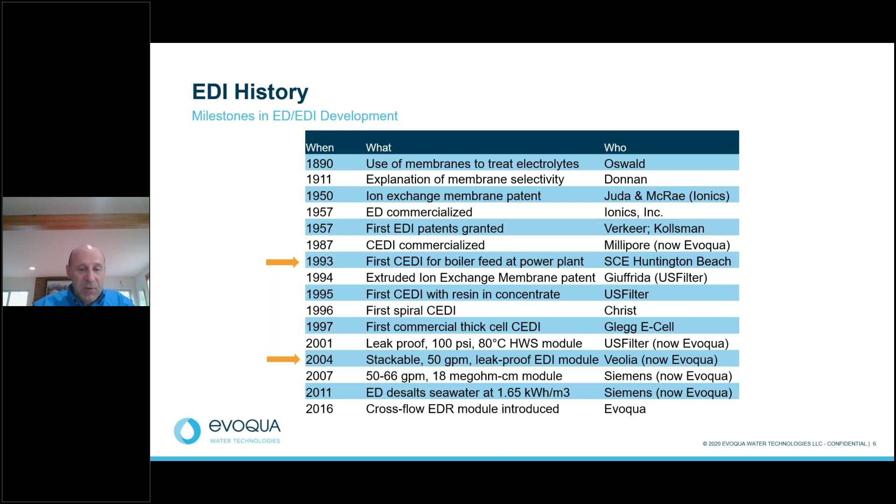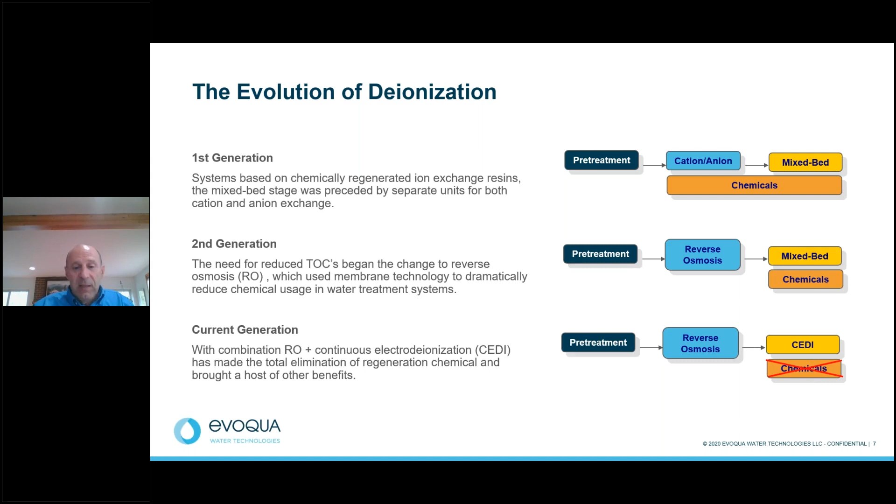A little bit on the evolution of deionization. You can break it down into 3 generations. In the first generation, you've got the flow of water through pretreatment and then into cation and anion exchange, and then into mixed bed resin and chemical regeneration. Later, in the second generation, there was the introduction of reverse osmosis, and you still had mixed bed and chemical regeneration, bringing us to the current generation where you have pretreatment, RO, and then into CEDI with no chemical regeneration.

I wanted to give you a view of the evolution of the technology in terms of flow rate and footprint. If you look at this slide on the left, you'll notice there was a system back in the 80s that had 20 gallons a minute of flow and occupied 20 square feet. Going to the right, that 20 gallons a minute jumps to 60, 120, and then up to today's standards, which are 528 gallons a minute in just 31 square feet. A tremendous improvement.

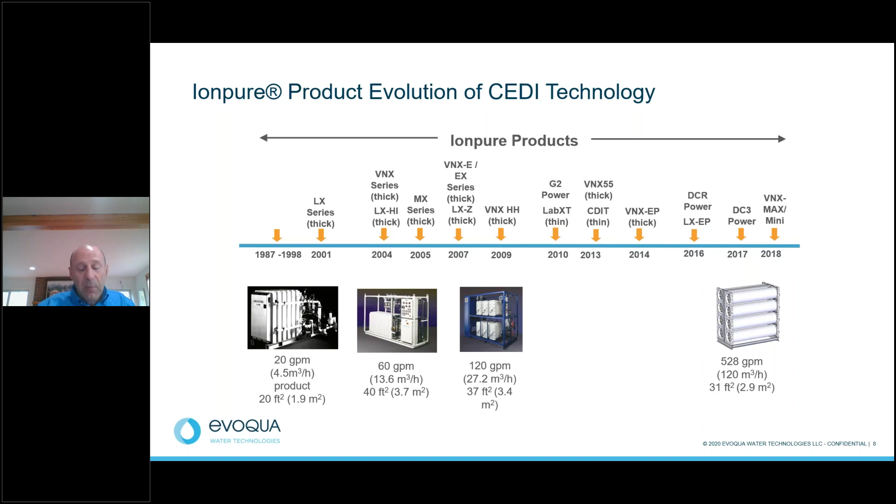I'd like to go into the basics of CEDI technology. First, this is an electrochemical process, based on the science of opposite charges attract and like charges repel. Essentially, you've got cations migrating towards the cathode and anions migrating towards the anode.

And you add ion exchange membranes and you get electrodialysis. This membrane is a sheet form of the ion exchange resins, and what's happening is you essentially take the resins, grind them up, and recast them into a sheet form. The membrane has a fixed charge and it's selectively permeable.

You've got an anion membrane with a positive charge, it's anion permeable, and it repels cations like sodium. The cation membrane has a negative charge, it's cation permeable, and it repels anions like chloride. These membranes are impermeable to water.

This is a little counterintuitive if you're not familiar with the technology. Most people think the water is going through the membranes, but the water is actually flowing past, not through, the membranes. These ions are diffusing through the water trapped in the membrane, and you've got alternating membranes using screen and gasket channels. Essentially, the salts are transferring out of the product stream and into the reject stream.

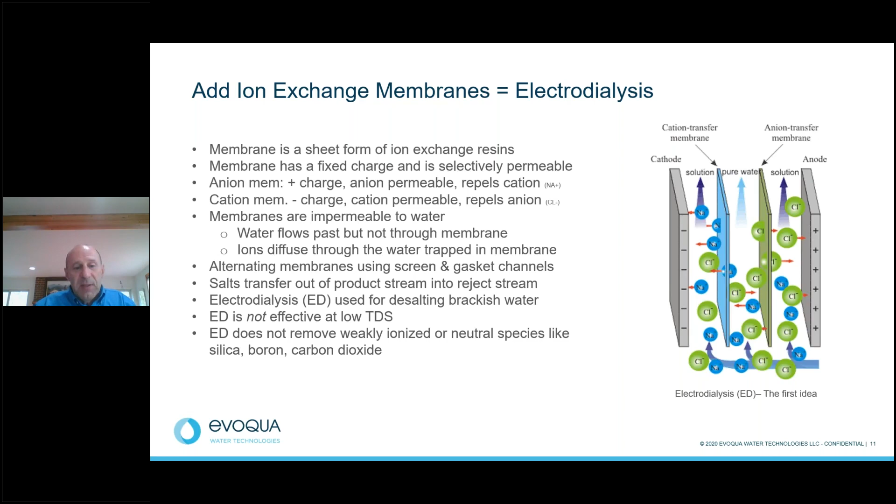Electrodialysis as a technology is used for desalting brackish water. It's not effective at very low TDS because it does not remove weakly ionized or neutral species like silica, boron, and carbon dioxide.

So you add resin to electrodialysis and you create continuous electrodeionization, or CEDI, which is a technology improvement on electrodialysis. The difference between the two is that CEDI uses ion exchange resin between the membranes, which is not the case with electrodialysis. This resin is very conductive, and it facilitates water splitting, which is important to allow the resin to regenerate.

The resin needs a special cell design to contain it. If you've ever felt the resin, it's very slippery, small beads—you put it in water and it's essentially fluidized, so you really need a special design to contain all that. CEDI is often referred to as filled cell electrodialysis.

When the salt is removed with electrodialysis, the system can no longer transport current and remove ions. So you have no current, then no water splitting, and no regeneration. CEDI, on the other hand, is designed to produce high purity water. The ion exchange resin allows for the removal of weakly ionizable species such as silica, boron, and carbon dioxide.

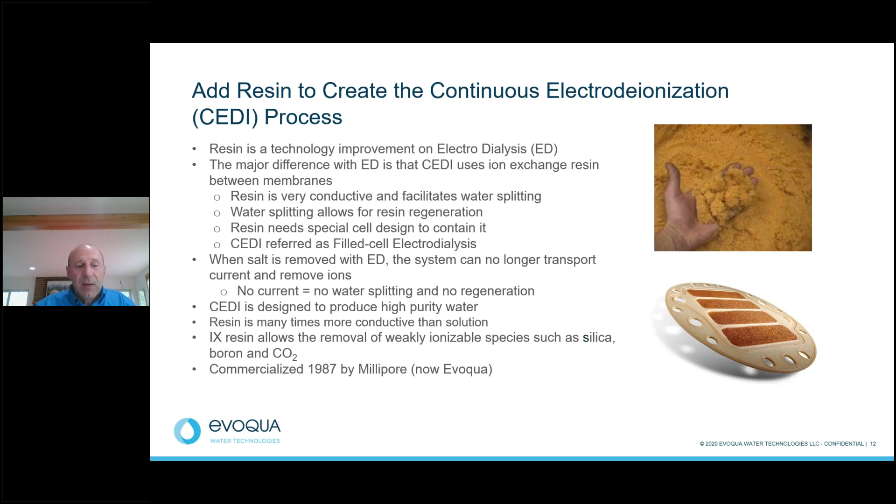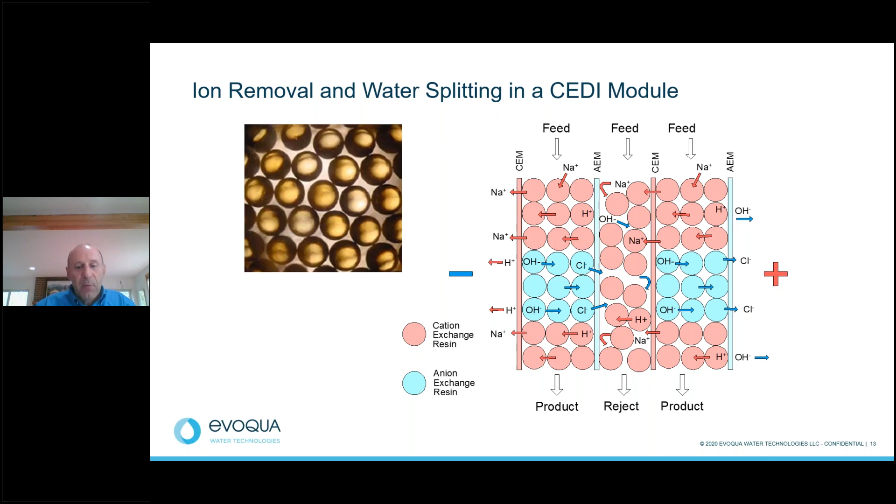This slide demonstrates ion removal and water splitting. Cations like sodium and hydrogen pass through the cation membrane, whereas anions like hydroxide and chloride pass through the anion membrane. Water is coming in through the top, and then the product and the reject are flowing through the bottom.

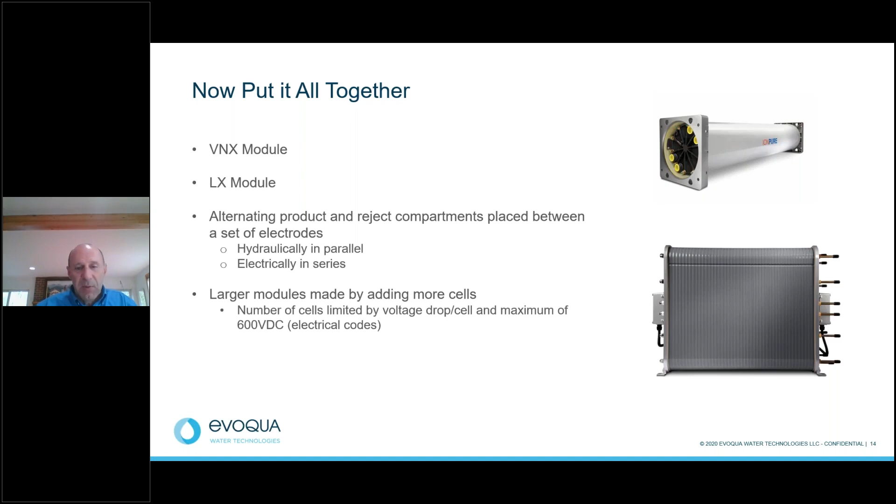Put it all together and you see here our VNX module. This is our flagship product for the power industry, with some of the highest flow rates of any module on the market. Down below you see the LX module, also used in the power industry. It has been used for many years, but with the introduction of the VNX, most applications are now using our VNX module because of its high flow rates.

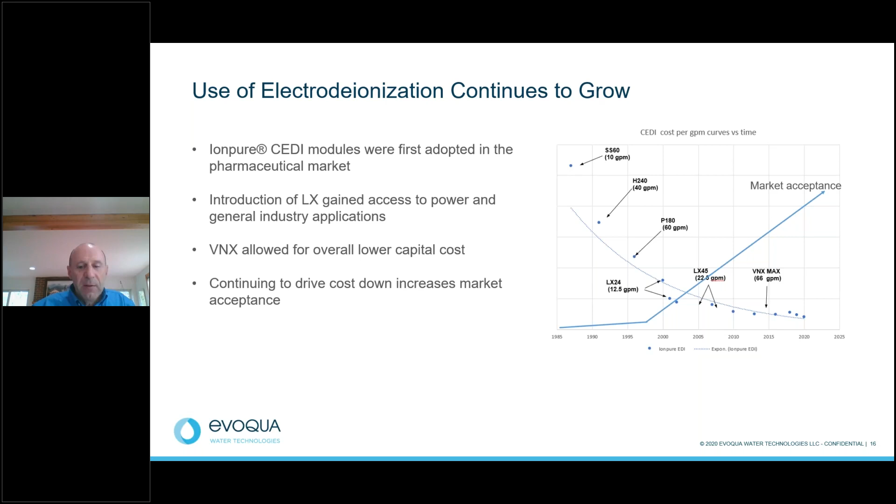Early CEDI modules back in the mid-'80s produced only 10 gallons a minute, as compared to today's VNX Max modules, which flow at 66 gallons per minute per module. So the greater the flow rate, the lower the overall capital cost, and the greater the adoption rate of CEDI over mixed bed DI.

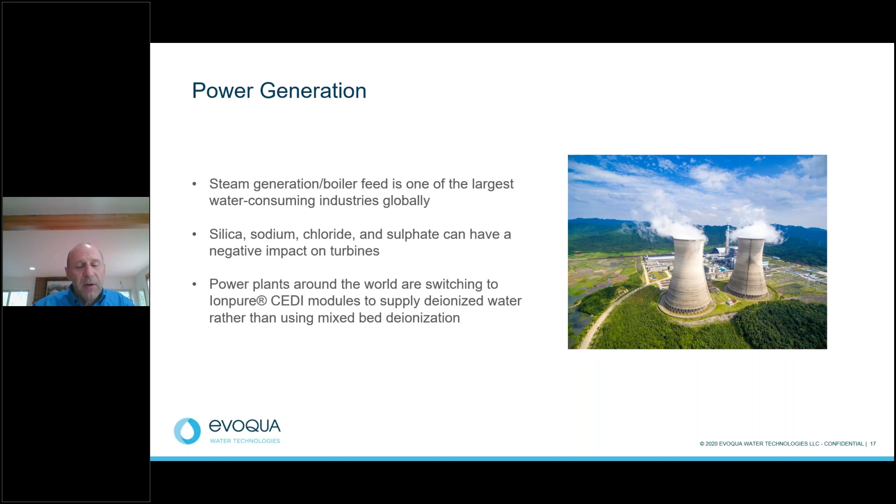CEDI is an ideal technology for the power market. The main issue for power generation is the impact of scale formation on the turbine blades, which reduces efficiency. With the size of some of these markets, just a slight reduction in efficiency of the power generator can cost very large dollars, so it's very important.

As you can see from this slide, high quality water is needed for boiler makeup in the range of 0.1 microsiemens conductivity or better. In some power applications, we recommend a 2-pass RO for the CEDI feed water, and also to very carefully control the CO2 in the system.

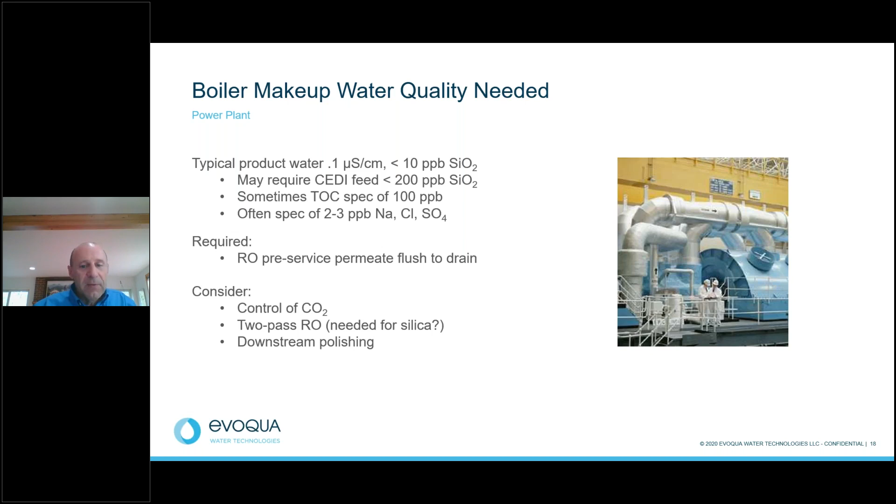So why is the power industry choosing CEDI over mixed bed deionization? Well firstly, no chemicals are needed for regeneration with CEDI. This is a huge advantage. Another is that there's less downtime, and this is a proven technology. CEDI has been around for dozens of years, and it's absolutely a proven technology in power plants.

You'll experience very consistent performance with CEDI technology. Our modules are guaranteed to be leak-free. This type of system has superior safety over mixed bed DI. You're not trucking in chemicals and regenerating on site. There's less space required, and it's also lower cost to operate one of these systems.

You've got reduced labor. Our process, CEDI, is a continuous process. It's not a batch process. Mixed bed DI is a batch process. Overall, you've got a reduction in environmental, health and safety risks when you're using CEDI.

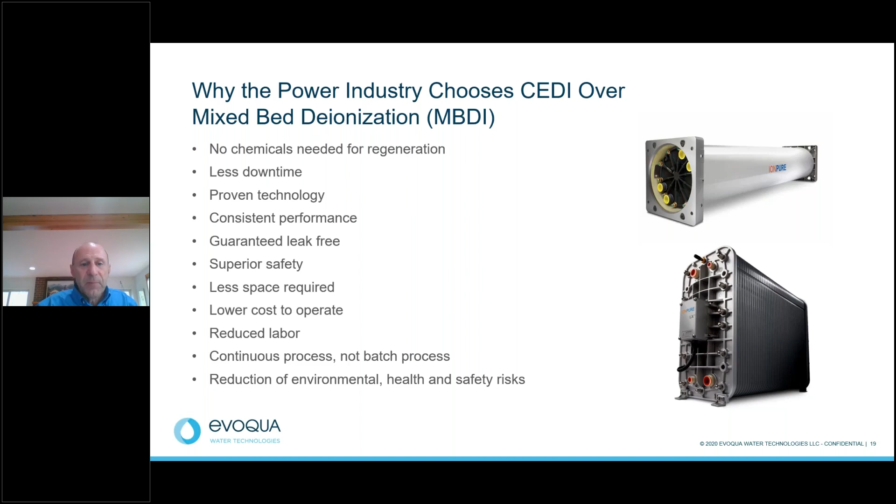The chart here on the left highlights how mixed bed technology is a batch process. So when the resin begins to deplete, the water quality goes down, and the system cycles through the chemical process again and again, regenerating the resin. Compare this to CEDI technology, the chart on the right, and you see a consistent line here. It shows this consistent water quality. So this is one of the main differences with CEDI technology.

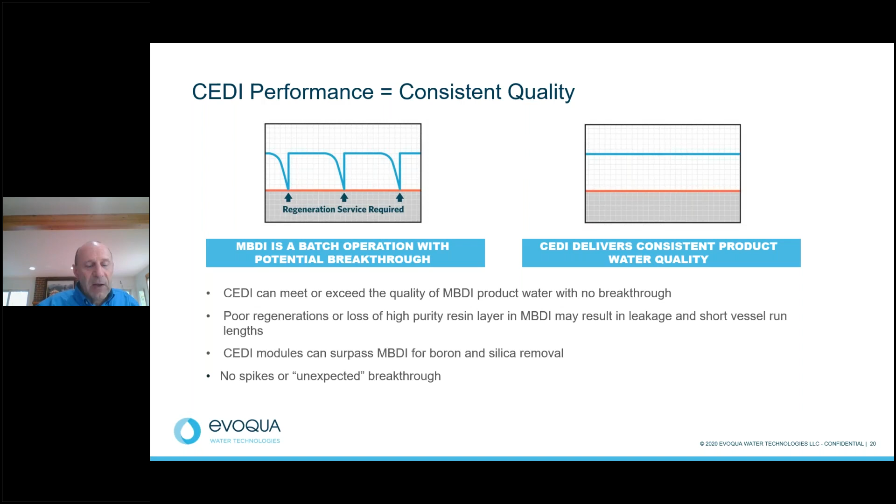I'd like to give you an overview of our products. This chart here shows you that we offer many products from the LabXT through the VNX, and this is showing their flow rates. So looking at the LabXT, this flows at fractions of a gallon per minute compared to the MX module, which is up to 2 to 3 gallons a minute.

The LX, our LX45 module, has a nominal flow rate of 22.5 gallons a minute. It will flow up to 30 with certain water conditions, and then into the CDIT and VNX module. The VNX module has a Max module, and that flows at 66 gallons a minute and up to 100 gallons a minute, again depending upon the water quality.

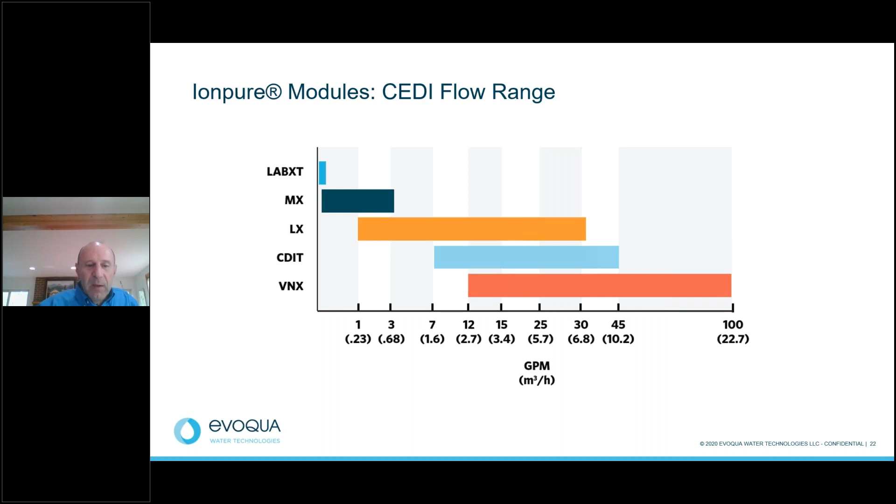Another view, this is a pictorial view of the various products. So here's your LabXT in the upper right. Our MX module looks like this. And then the LX used in the power industry, and the VNX. And then very importantly, here's our power supply, the DC3. This is very important as OEMs are building systems. It makes the whole process simple, and it's designed for these modules.

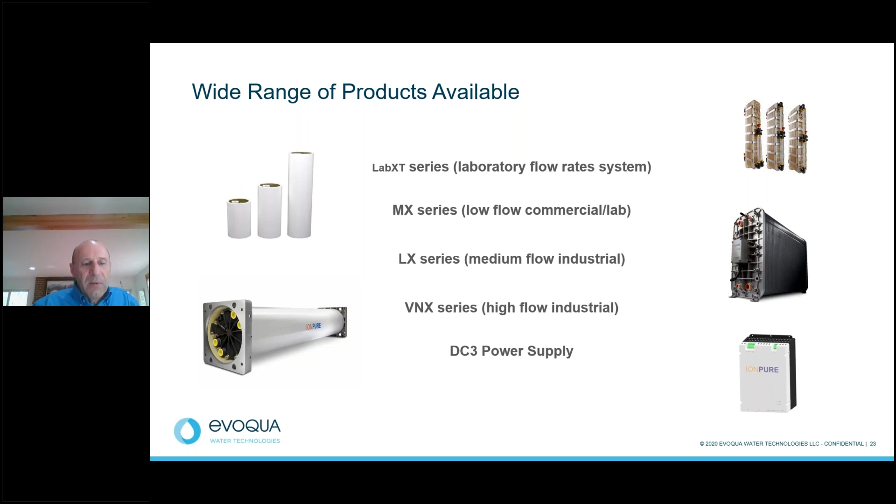A little bit about the LX series. This is a medium flow product for the power market. It was introduced in 2001. We offer 6 models from 2 to 22.5 gallons per minute nominal flow. This is a thick cell design in which both the dilute and the concentrate spacers are filled with resin. It's designed for high pressures up to 100 psi, continuous operation up to 113 degrees Fahrenheit.

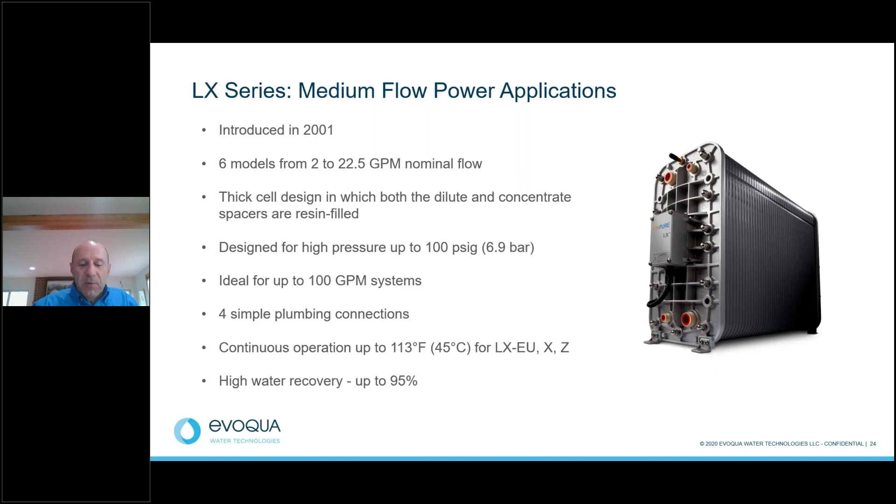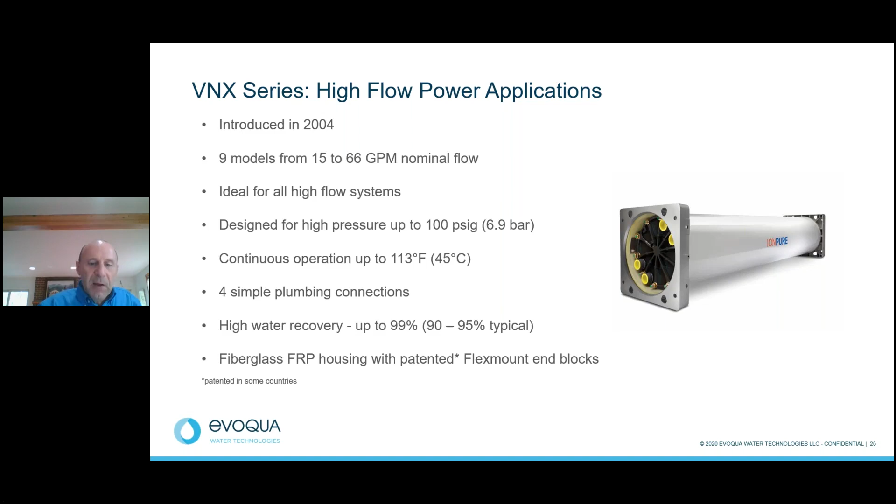The VNX series offers a wide range of module types. On the top here, you'll notice we have the VNX Max, the Mini, the EP, and this is a smaller version of the EP. These modules here are ideal for the power industry, and most typically we use these in those systems.

The Max, again, flowing up to 66 gallons a minute at nominal. The Mini is a great option because it's not as long, so it's shorter in length at 52.8 gallons per minute. The VNX EP 55 is a 55 gallon a minute nominal product. It's the same length as our VNX Max. And then we offer a shorter VNX 28 EP, which is shorter yet at 27.5 gallons a minute.

We also offer several modules that are optimized for the microelectronics industry and producing over 18 meg water, the VNX E and the EX. In addition, we have the VNX 55HH and the CDIT. These two modules were designed for higher feed flow challenges and product water up to over 16 megohms.

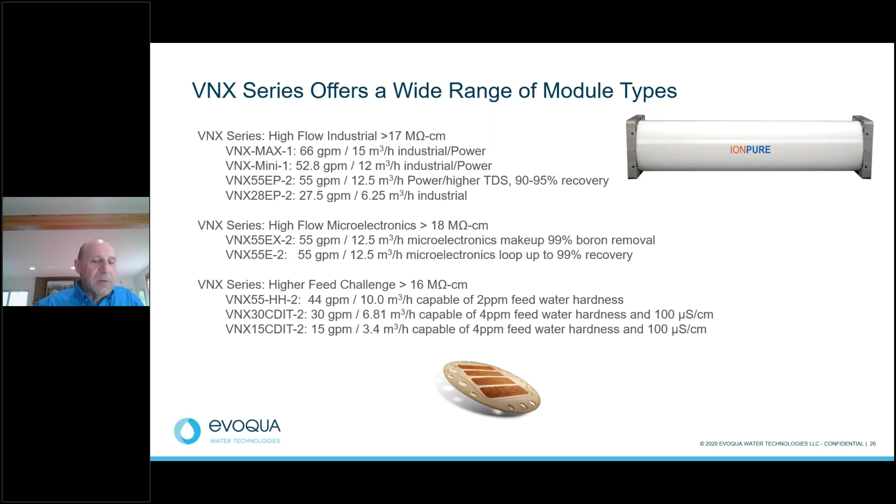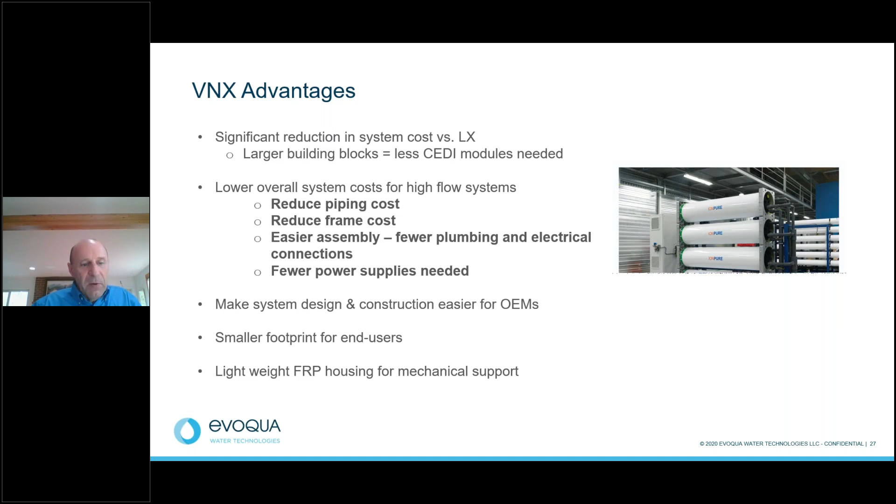Some of the advantages of the VNX over our LX is that basically you've got a larger module with larger building blocks, and it occupies less space. That's a big benefit when you're building a system. You've got reduced piping cost, reduced frame cost, it's easier to assemble, fewer connections, fewer power supplies needed. There's a lot of reasons to use the VNX in these high flow applications. It generally offers a smaller footprint for end users, a huge benefit in the plants.

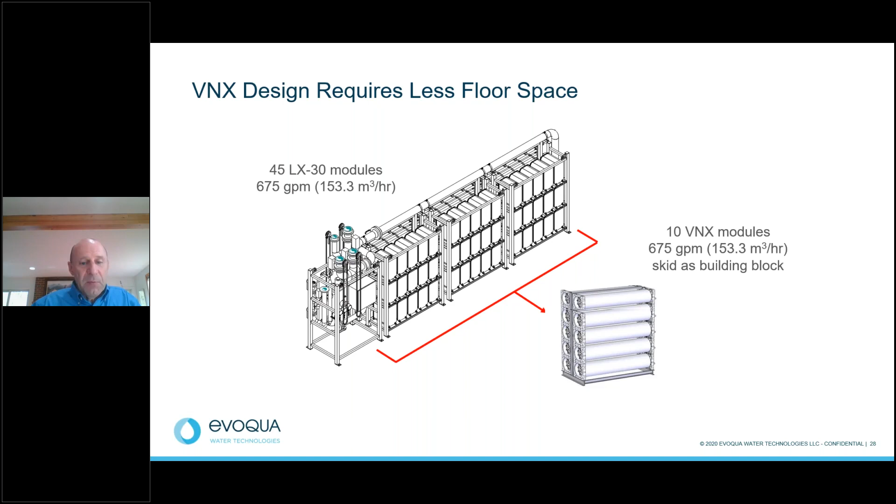Some of the first CEDI systems used an LX30 module at 15 gallons a minute each nominal. Here you can see how we have evolved from a skid with 45 LX30 modules with an overall flow rate of 675 gallons a minute to a skid using 10 VNX Maxes in a much smaller footprint. So, obviously a big advantage there.

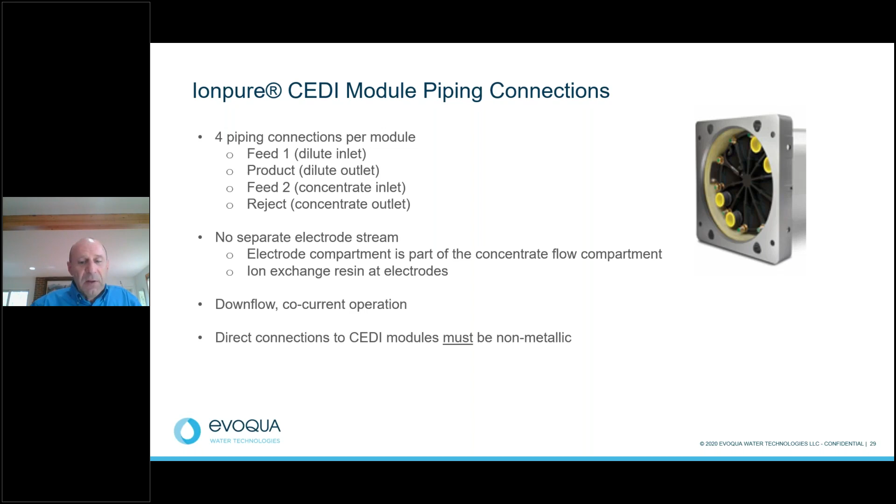The VNX has 4 simple plumbing connections or piping connections. You've got dilute in, dilute out, concentrate in, and concentrate out. Some of our competitors require additional separate electrode streams, which we do not have on our design. So that makes our skids simpler and easier to build.

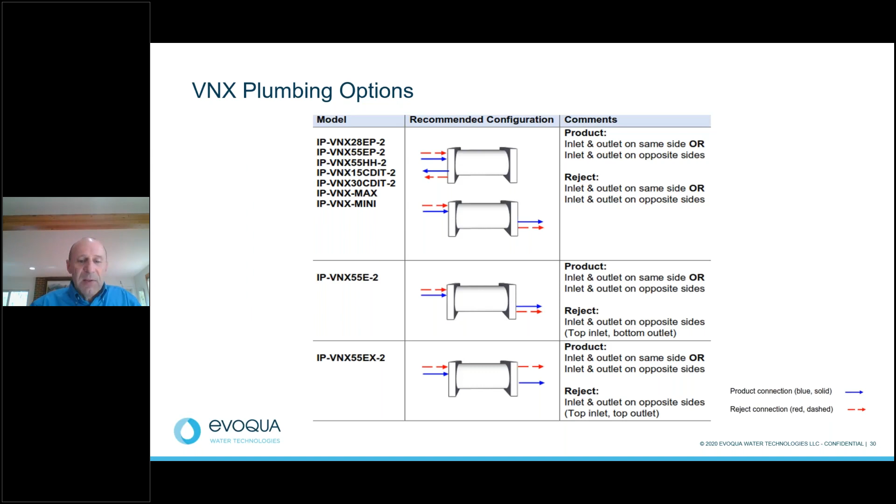This slide demonstrates the flexibility of the VNX connections. You can have the product or reject inlet and outlet on the same side of a module, or you can also have it on the opposite side. So a lot of flexibility there.

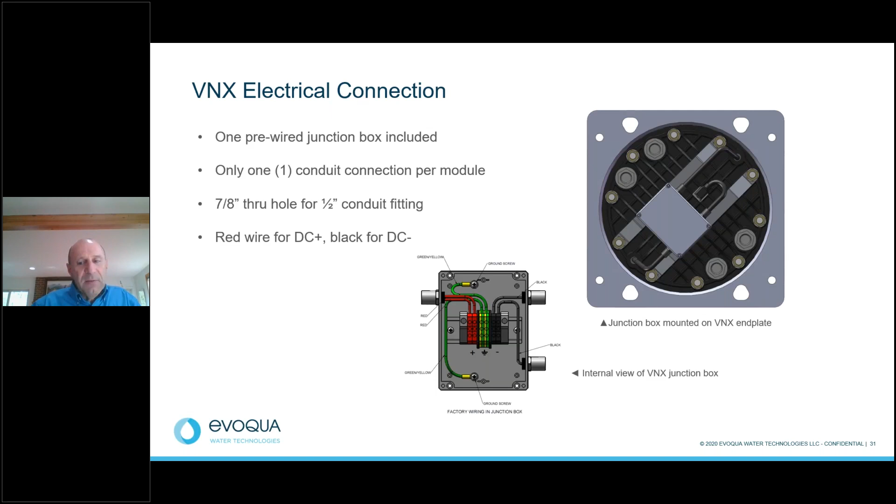The electrical panels, electrical connections are equally as simple. You've got one pre-wired junction box with one conduit connection per module. There's a red wire for the DC positive, a black for the DC negative, and a ground wire.

We generally recommend that any CEDI system is fed by a single or a double pass RO. So shown here are the maximum conditions for the feed water to the CEDI. The CEDI feed water must be carefully controlled to prevent membrane and resin fouling.

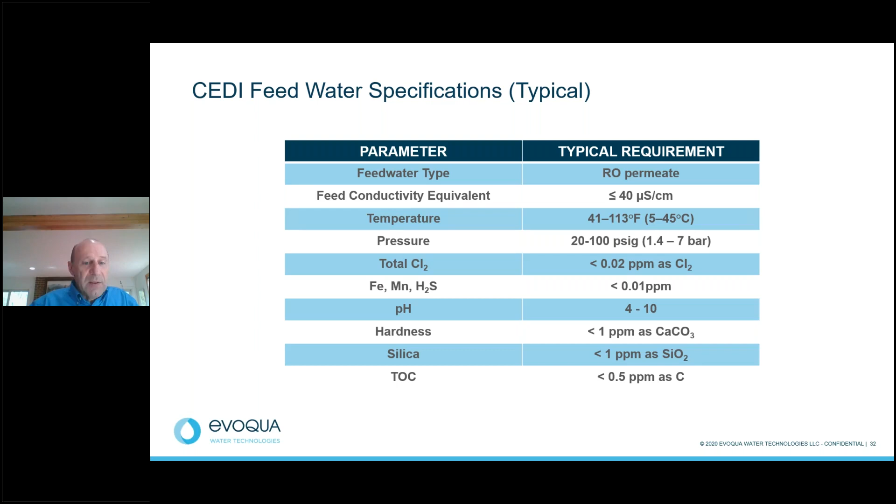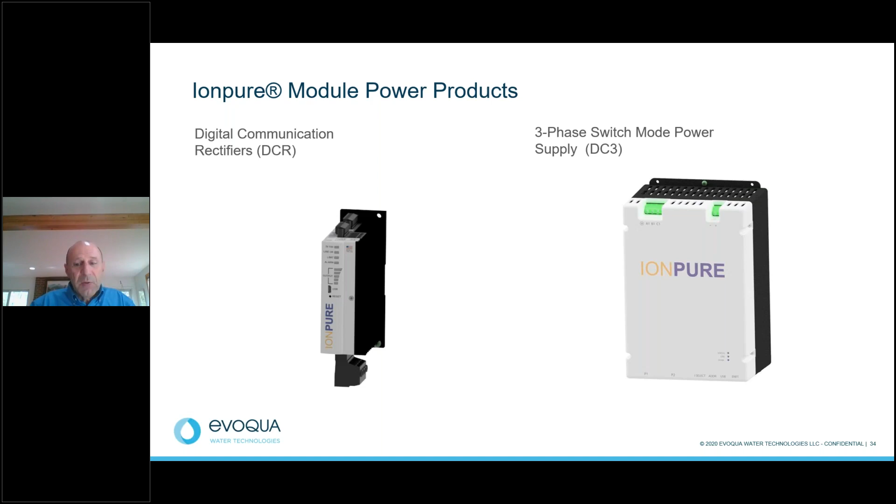Very importantly, Ionpure has designed several state-of-the-art power supplies. We offer a DCR rectifier on the left, which requires a separate isolation transformer, or you can use our DC3, which is on the right. This is a 3-phase switch mode power supply with a built-in isolation transformer. We've also recently improved the efficiency of several of our VNX modules where under certain circumstances, you can actually run 2 modules from one DC3 power supply, further reducing cost.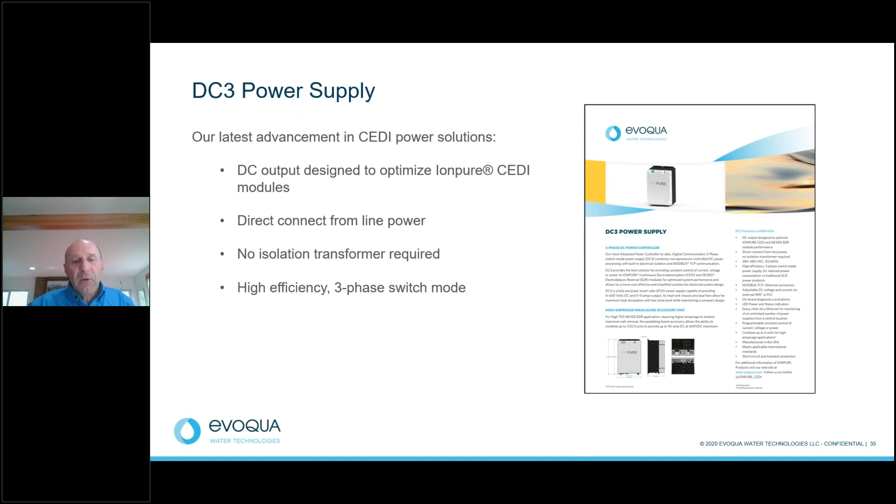If you go to ionpure.com, you can get the specs on the DC3 and all of our products, but this is just to demonstrate that. You're free to go on and log in and register and pull this information right off the web.

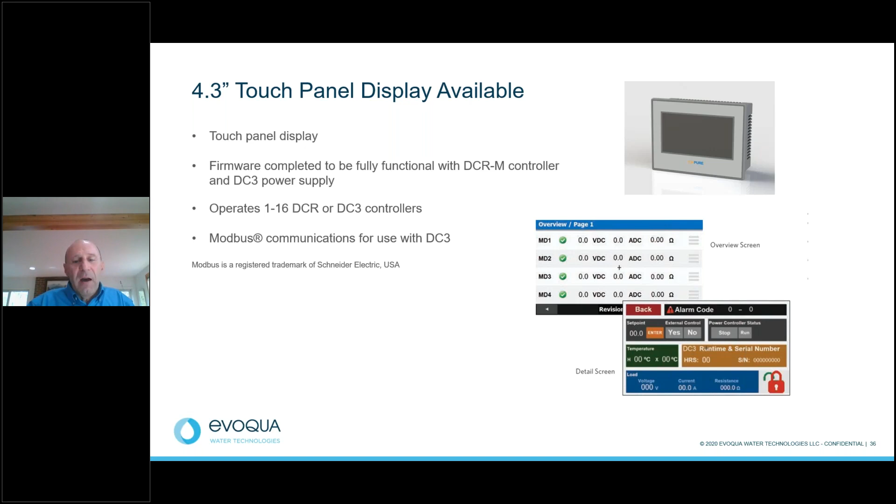We also offer a touch panel display that has firmware that's fully completed and fully functional with the DCR-M version and the DC3 power supply right out of the box. This unit can operate up to 16 DCRs or DC3 power controllers, and it uses Modbus communications on the DC3.

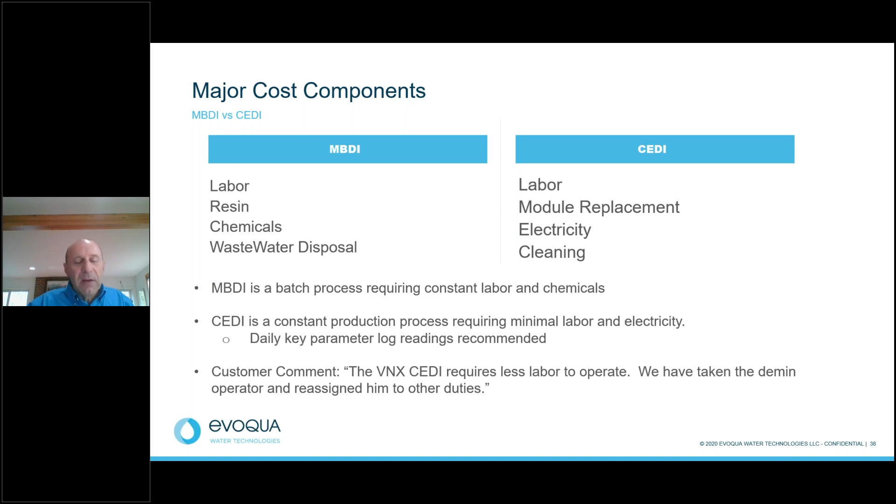I'd like to compare some of the attributes of mixed bed DI to CEDI here. As I mentioned, mixed bed DI is a batch process, and as such, it requires constant labor and chemicals for regeneration. CEDI, on the other hand, is a constant production process requiring minimal labor such as daily parameter logging. The main costs for mixed bed DI are chemicals, labor, and resin, and the main costs for CEDI are the module replacement themselves and electricity. So there's a significant difference between these two technologies.

And this is based on a conservative estimate of the module life, when in reality, if properly maintained, our modules can last for years longer. We've got some modules that have been in use for over 10 years.

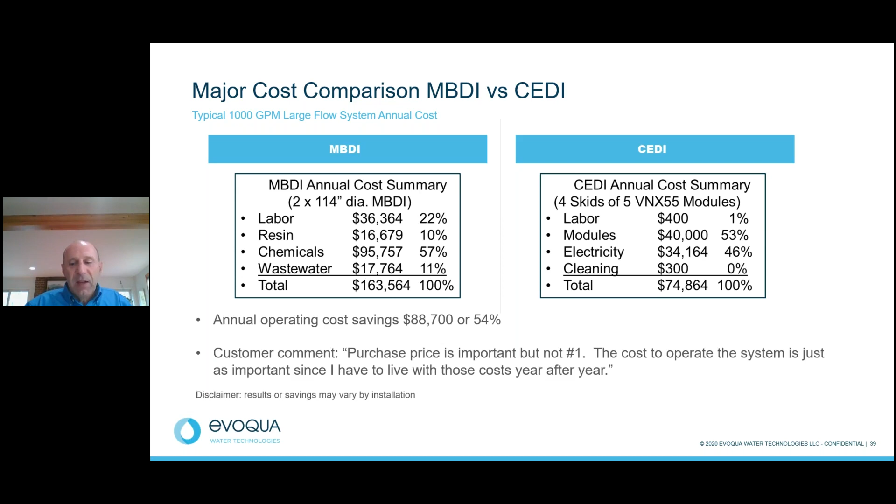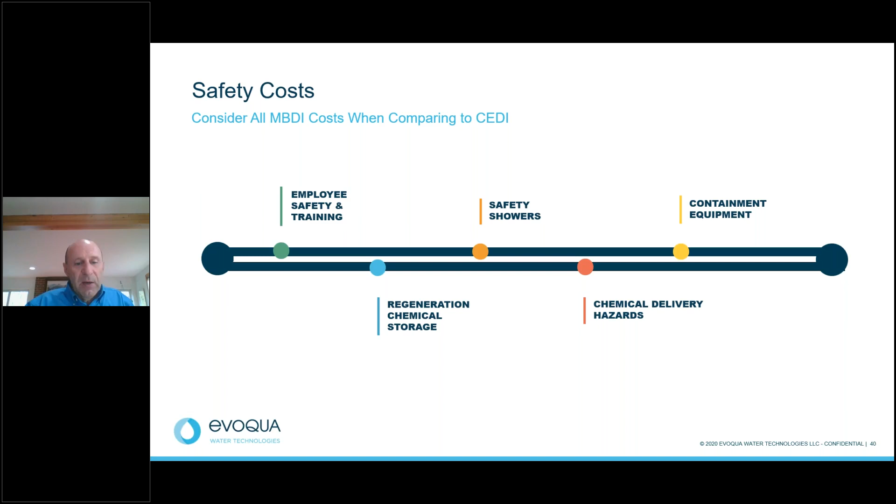Another factor to consider are the intangible costs associated with the handling of the hazardous waste chemicals with a mixed bed system. You really need to consider all the costs when evaluating these two technologies. Examples are employee safety and training, containment equipment, regeneration chemical storage, and other costs.

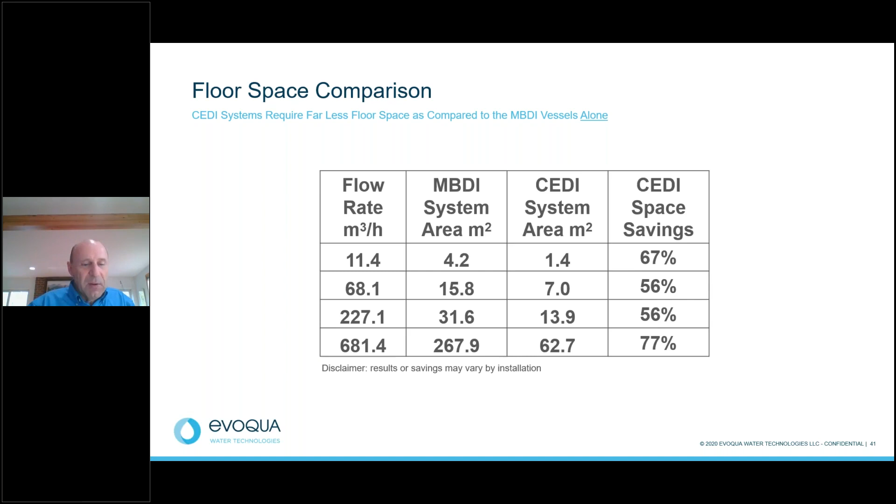Here, demonstrating that there's a floor space savings associated with CEDI versus mixed bed. You can see it's possible to save over 50% on the floor space, and that space can then be redeployed to other uses. So that's a huge advantage as well.

I'd like to share with you our standard warranty, autopsy services, and some other resources that are available.

We provide a standard 3-year prorated warranty for all our industrial CEDI modules, provided that the units are installed and operated to our specs. The feed water must meet our minimum requirements. We also offer module testing and autopsy service from our factory in Tewksbury, Massachusetts.

If there was a problem with the module and you'd like to find out why that happened, we'll receive your module and do a complete analysis of every critical aspect to determine what might have gone wrong, and provide a written report, including photomicrographs of the resin, as well as chemical analysis of any contaminants that we find as needed.

Some of the other resources available at ionpure.com - we encourage you to become a registered user and gain access to many of these resources, including the IP Pro projection software, technical material, drawing software updates, regulatory certifications, and many other pieces of information that will be helpful.

You can also sign up for our newsletter and get the latest news on product notifications, handled by our product manager, Pat Buzzle.

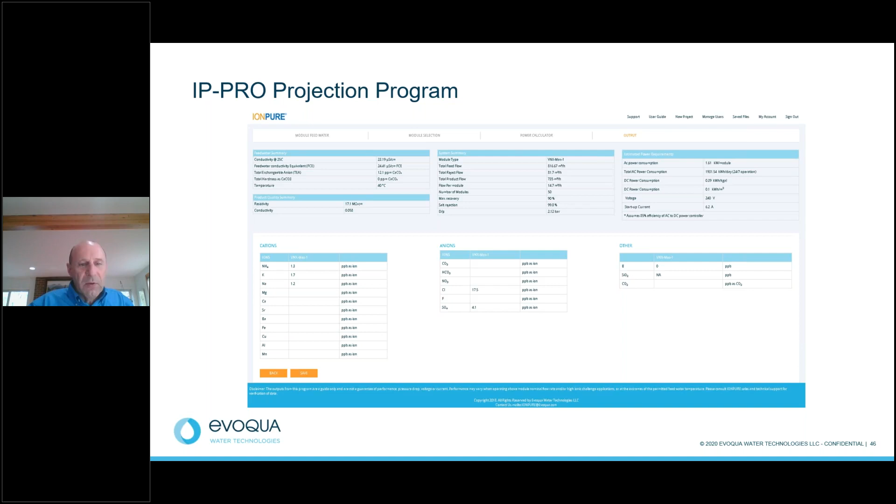Here's an example of an IP Pro projection. This online software program is very easy to use. You add the RO water chemistry to the program along with your required flow rates, temperature, and module type. The program then provides a projection report giving you the output flows, the water quality, recovery, pressure drop, the power use, voltage, current, and many other details. A great tool, real good resource when you're designing your system.

I wanted to show you a few examples of installations. Here's one in Pueblo, Colorado. This would be on the smaller size. To give you a little bit of history, the site originally used pretreatment of cation and anion and then into mixed bed deionization. They upgraded to RO mixed bed and then further upgraded to CEDI to reduce waste and operating costs using the VNX module.

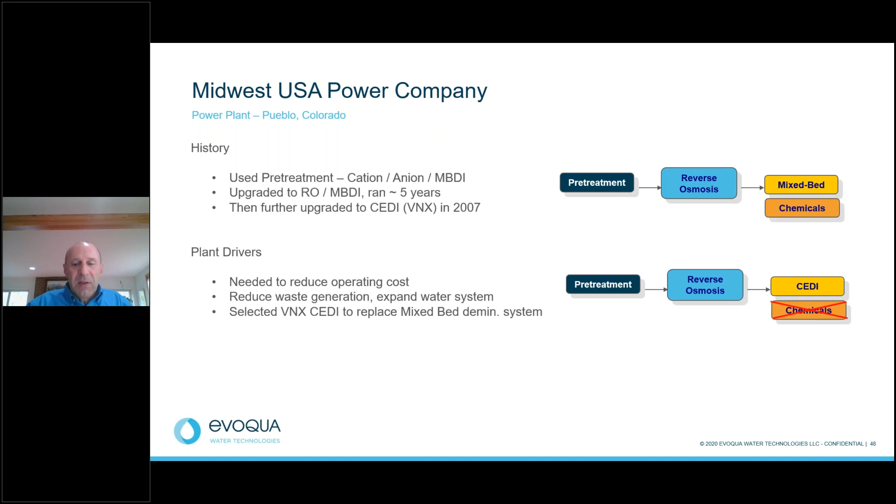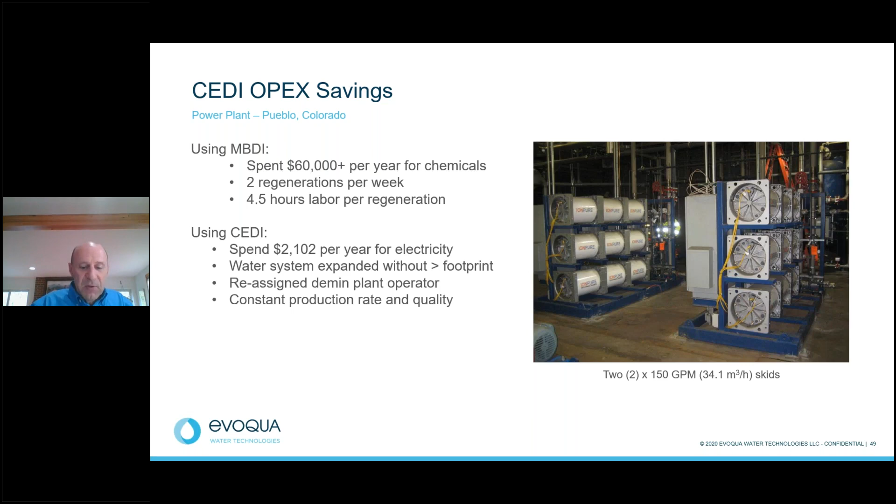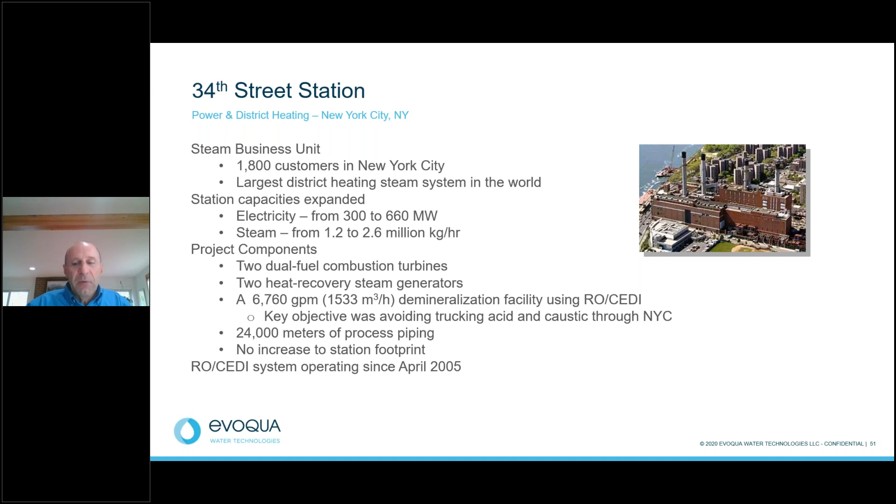And a flip side of that is here's a very large installation in New York City. I'll show you some details here. This is one of the largest district heating systems in the world, using 6,760 gallons per minute of demineralized water with RO CEDI. This is serving 2 dual fuel combustion turbines and 2 heat recovery steam generators.

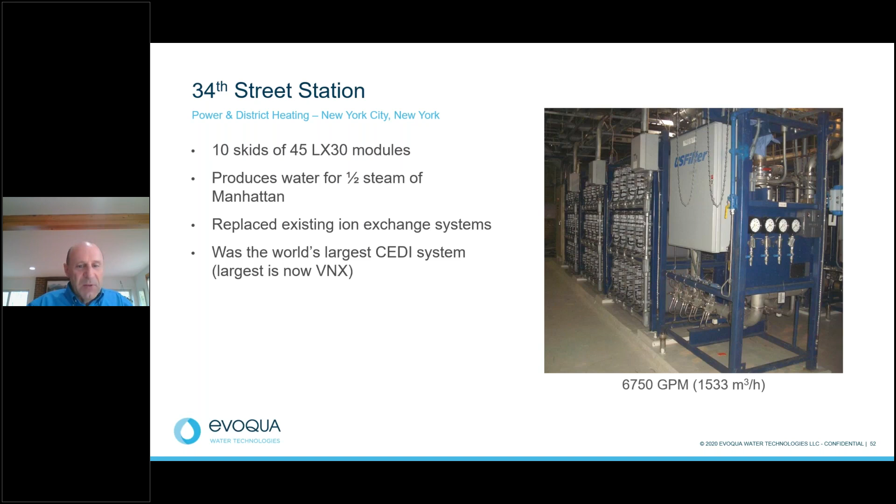This system has 10 skids of 45 LX30 modules in operation, and they produce half of the steam for Manhattan. If this were built today, you'd be using VNX modules in a much smaller footprint, but this is a system that is still running today. It's been running successfully for many years.

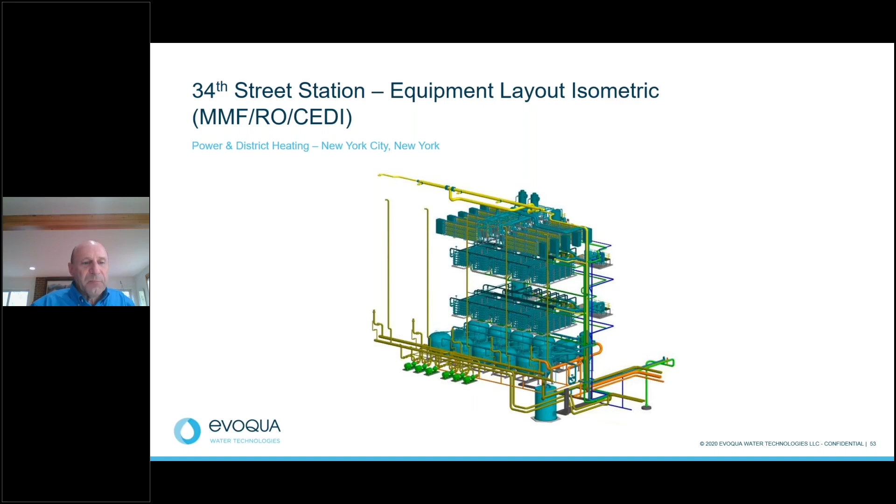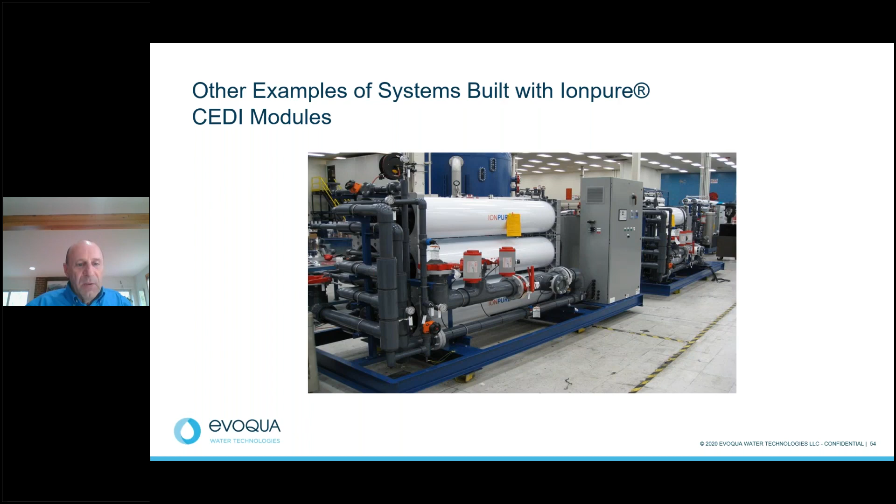And here's another example of a system using Ionpure CEDI modules. You'll notice this is a small footprint for this skid, a very simple manifold here, and the electrical panel. Very well-built skid, ideal example.